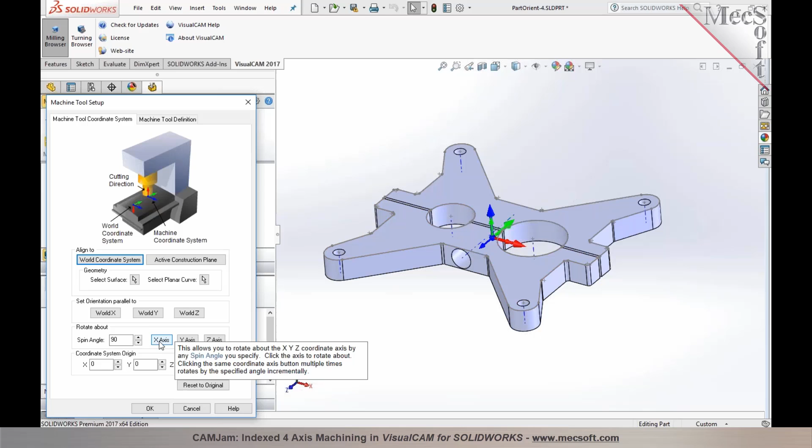So let's consider this particular part. We would like to program it from two sides on a rotary axis. So the first step is we need to establish the orientation for the machine tool. So this would be done exactly like what we did earlier. So we established the machine tool coordinate system.

Now once you establish that, you would want to go ahead and establish your machine tool definition as 4-axis, and you specify your rotation axis. It could be along X or Y for most machine tools, and you choose either positive or negative X, and also you want to make sure you set your rotary center at the center of your part or stock geometry.

Now once you have this established, your initial setup, which would be your orientation of 0 degrees, is automatically established, and the setup 1 inherits the orientation of the machine tool coordinates. And you would now program your tool paths. Now before you program your tool paths, you could be establishing your stock material.

In this particular step, I'm going to just create a box stock in here, and I'll establish the 0, which is the XYZ origin. I could be placing it to the highest Z southwest corner right in here, or I could be establishing it right on the center line of the part. It could be along the west or east, or I could even just leave it right where it is in the center and in the mid Z as well.

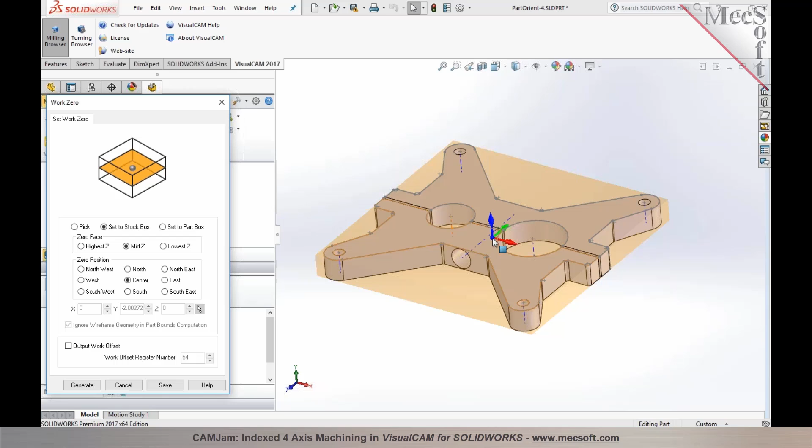So in this particular case, I wouldn't even have to establish a work 0 if your XYZ origin for machining and the rotation center are going to be right at the same location. Now once this has been established, you would program your tool paths for the top. So I'm going to just go ahead and add a profiling operation in here.

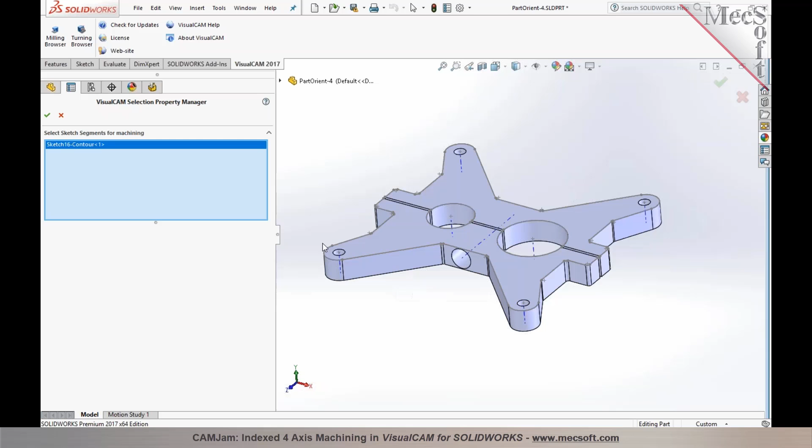I'll profile around the outside edge. I'm going to do select loop around it. Select the contour on the part. Pick a tool for this process in here, and we'll establish the tool path.

So once we have the top half programmed, we would go into setup and create what is called a rotate table setup to index it. Now the rotate table setup allows you to index it, and this is being rotated based off of the machine tool coordinate system orientation that you established in here.

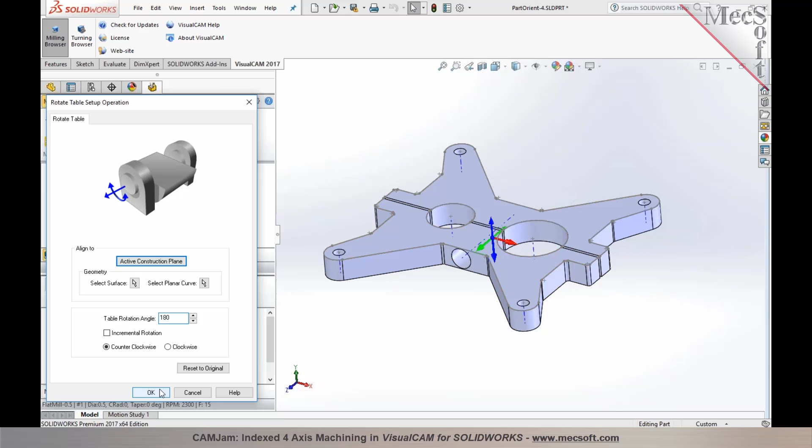And you get it oriented to 90 degrees if you want to do these holes, or if you want to just do a flip of 180 degrees, you specify the rotation angle as 180 degrees to create it, and then you can program your tool path. So in this particular step, the part would be rotated on your rotary axis on the machine tool. When you post-process the tool path, it'll output the table rotation angle as well.

And then you can program your tool paths in here. So I could be programming a similar type of operation like a profiling, or I could be doing a pocketing, or I could be doing any 3-axis operation in here. For example, I could use a horizontal finishing operation and generate the tool path.

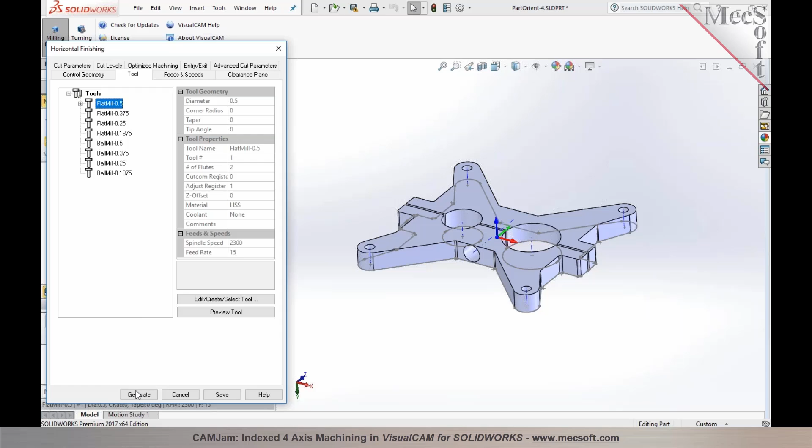So once you have these operations programmed, you would select your machining job, right mouse button click, and then select post all, and you can select your post processor from the list in here. And I'm just going to go ahead and grab a FANUC post in here, specify your folder, and your posted code appears. You can see that your A0 appears right at the top.

It establishes your initial orientation, and then you'll find the orientation for setup 2 where you have the A, or the rotary axis. In this case it happens to be the A axis, which rotates by 180 degrees. And this is how you can create rotate table setups to program indexed 4-axis operations.